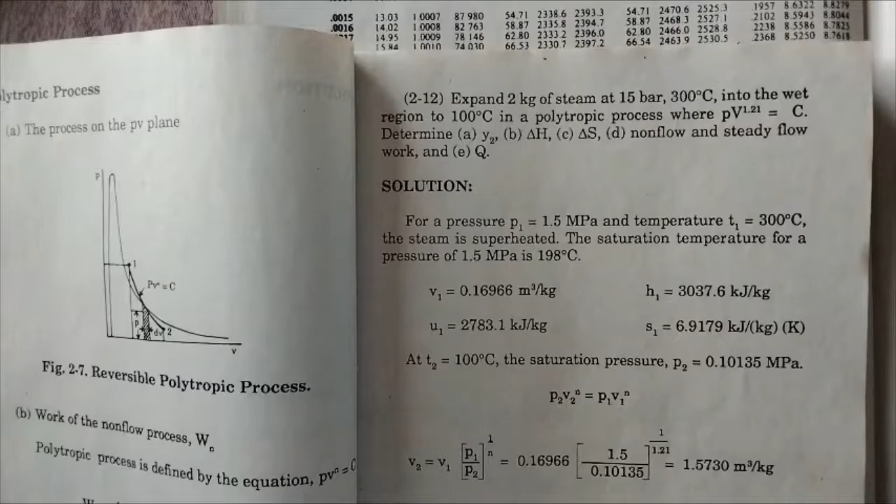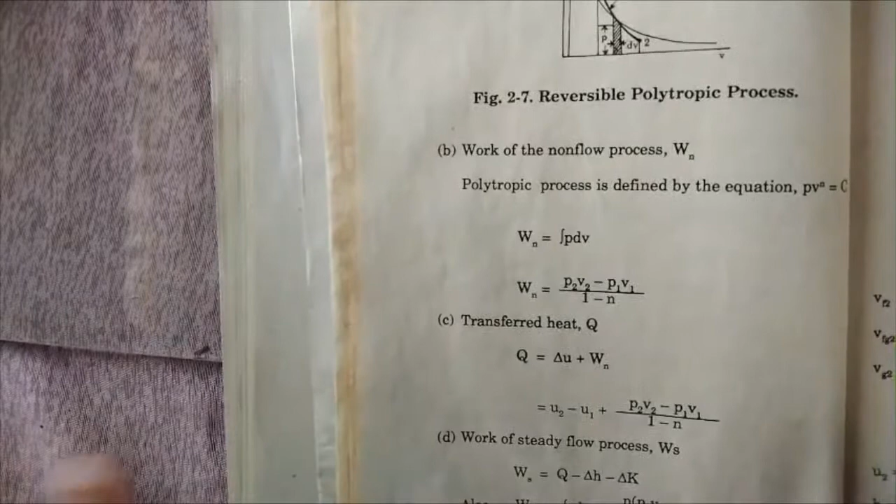Okay, so polytropic process tayo. Same formula. Recall thermodynamics 1 natin, ang work non-flow ay ito: the integral of PdV, or pwede rin siyang P2V2 less P1V1 over 1 minus n. Then, the heat transfer is ganyan pa rin, delta U plus work non-flow.

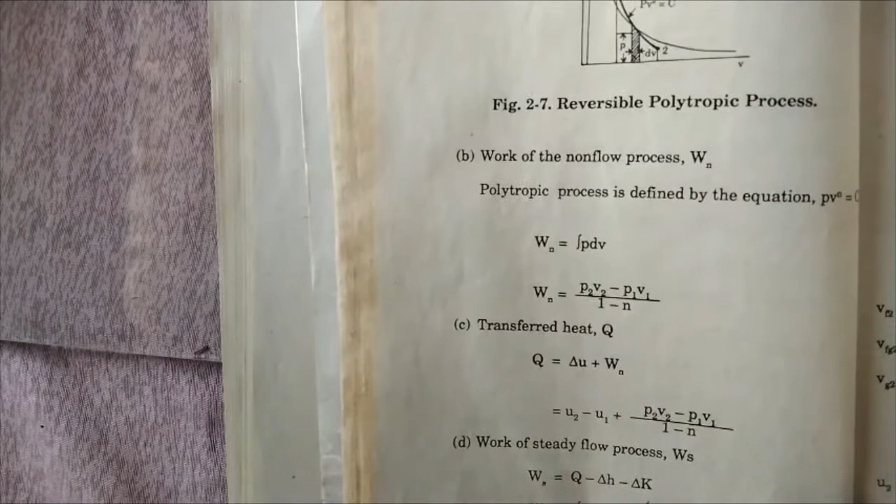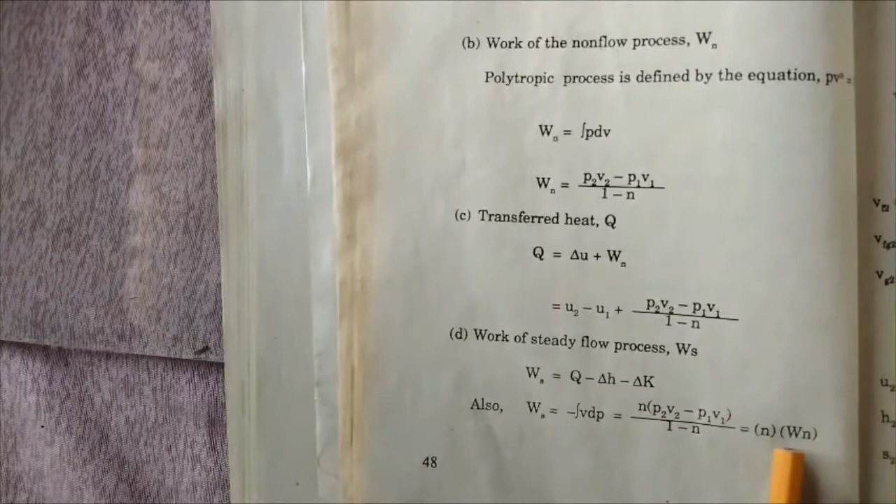Kung steady flow naman, is Q, work S is Q minus delta H minus delta K, or just recall, work S is N times work non-flow. Kapag na-solve nyo na yung work non-flow, i-multiply nyo na lang sa N, ganun na lang kasimple. Pero kung wala talaga, i-solve nyo.

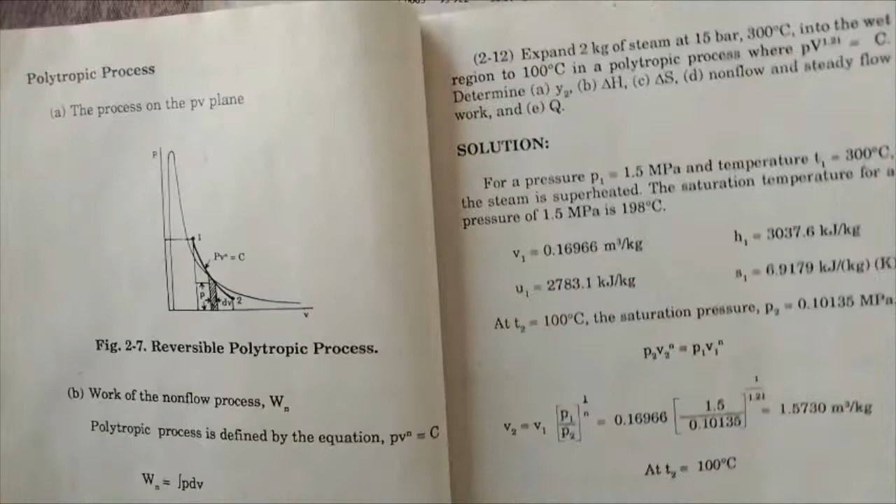Ito yung mga kailangan na formula. So, problem na tayo agad. Ito nga, 2 kg daw of steam at 15 bar. Itong 15 bar class, i-multiply niya siya ng 100 para maging kilopascal, so maging 1500.

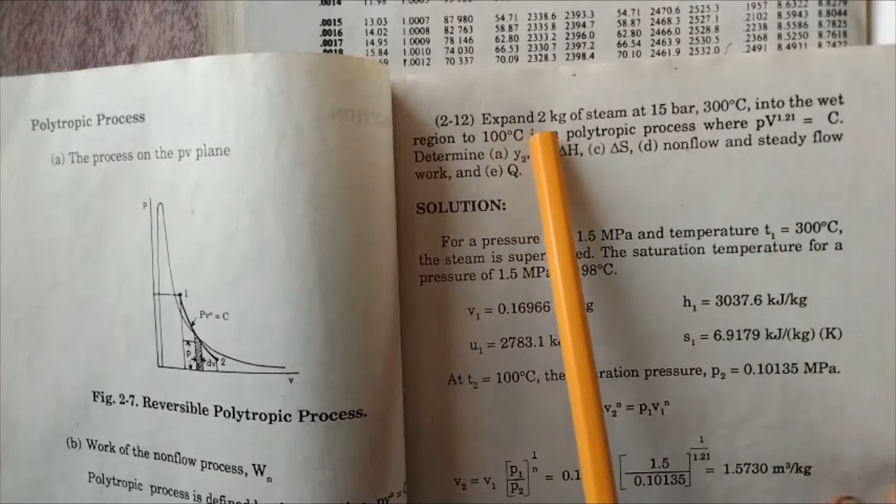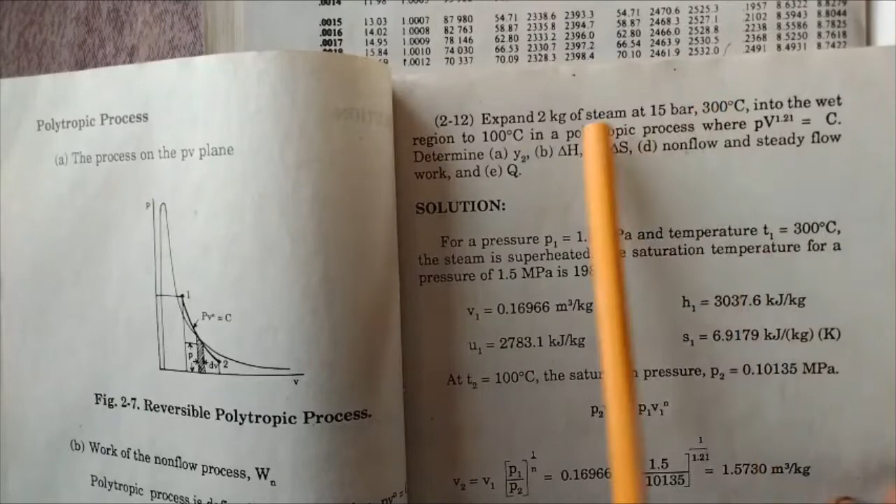And then, sabi niya rito, expand, 2 kg steam at 15 bar 300 degrees into a wet region pala to 100 degrees. So yung 15 bar and then 300 degrees, expand ba siya? Expand siya sa wet region. So, bale tingnan nyo yung 1.5 megapascal na katapat ng 15 bar sa saturation pressure.

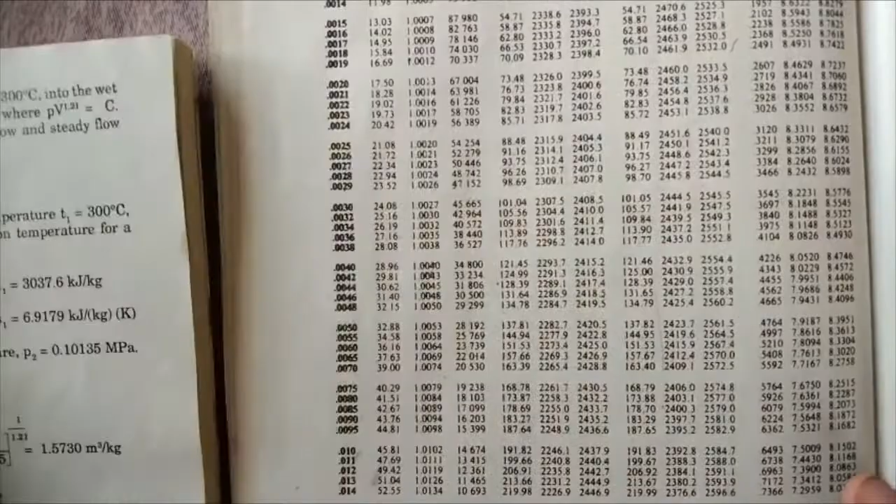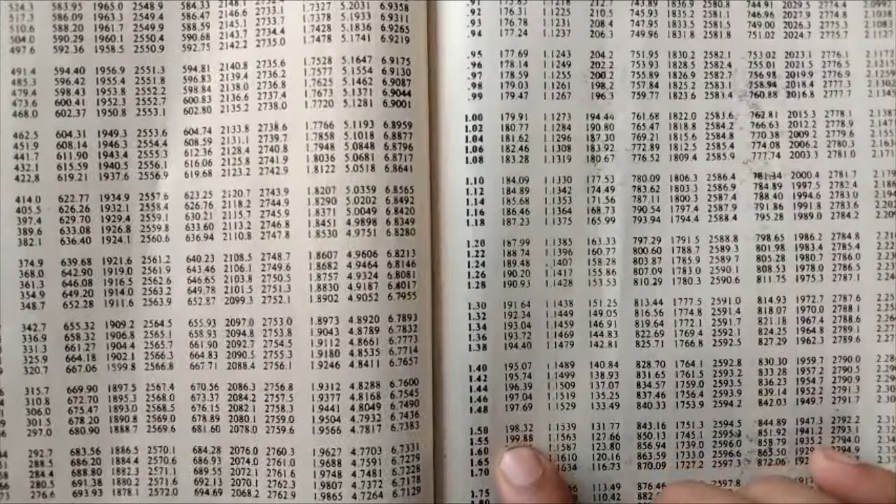1.5 MPa, tingnan natin. Para, ano lang, 1.5 MPa. Ito, 1.5. 198 yung temperature niya, is 300 to. So, superheated talaga.

So ngayon, kailangan nyo, kasi yung formula natin, recall itong relation ng pressure tsaka volume. Ito rin, walang nagbago: V2 over V1 is equal to P1 over P2.

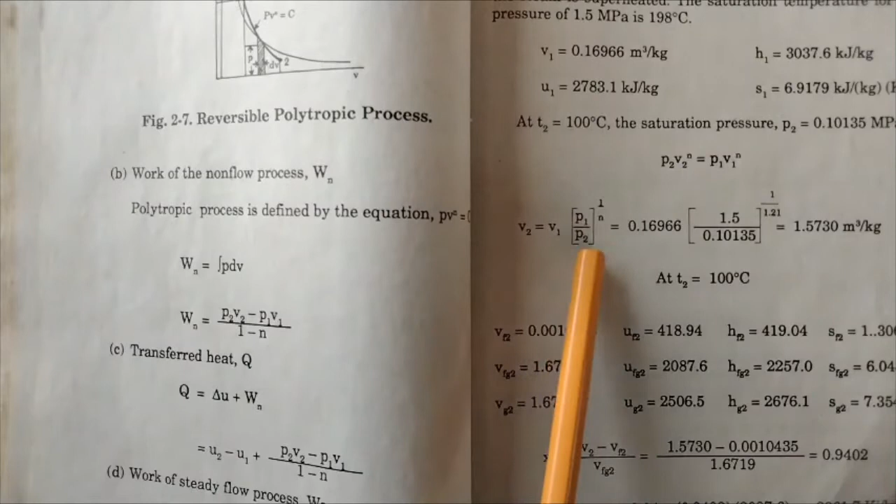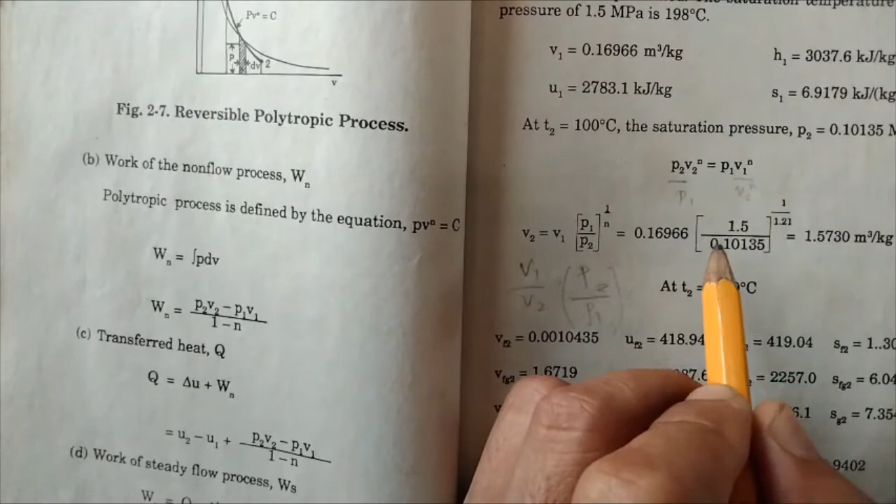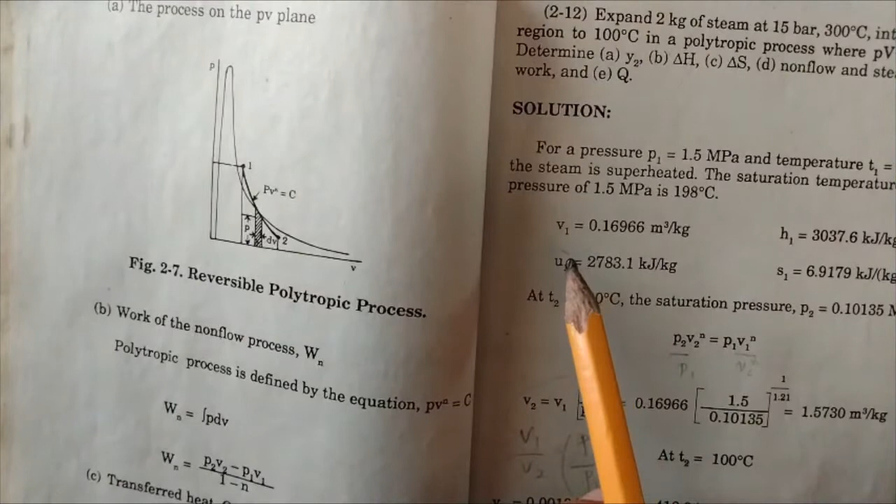Then now dito, so dito muna tayo. So kailangan yung volume, kasi nga dahil nga sa formula na relation ng volume at saka temperature. Pressure pala. So tingnan nyo doon sa 1.5 megapascal.

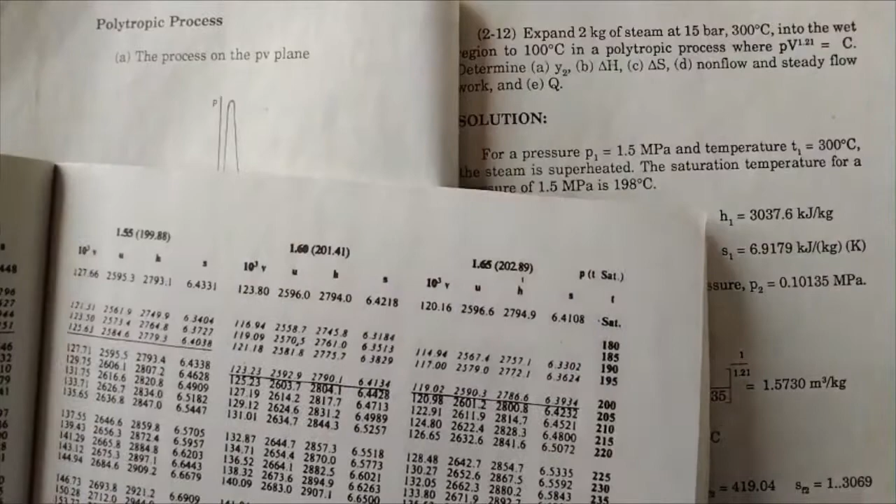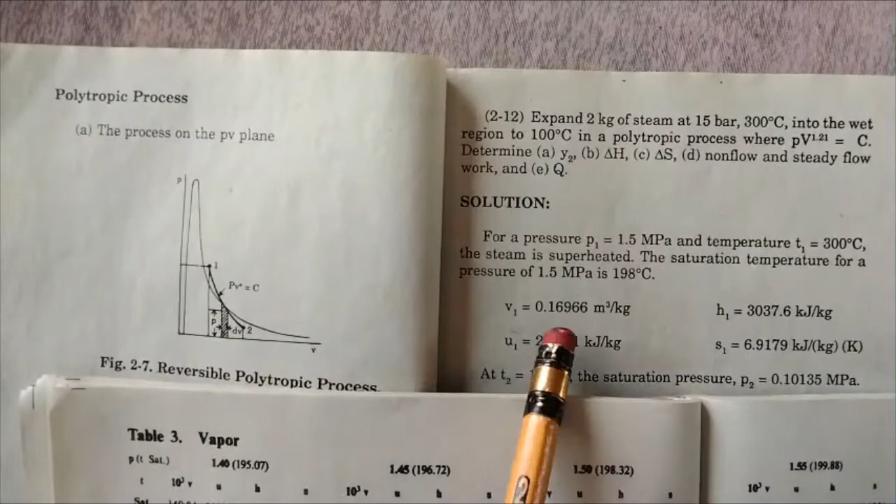Sa table 3 na tayo, 1.5. Ayun, may 1.5, so 1.5 and then 300 degrees Celsius. Andito na yung V1 dito is 169.66. Tingnan natin, tama, meter cube na, dito kasi sa steam table is liter. So, yan na, so may V.

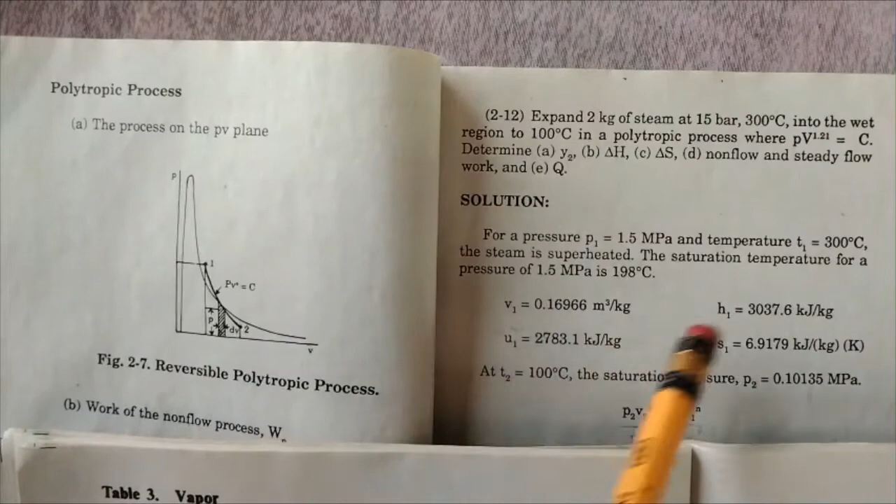Follow na rin yung matik na to. Makukuha nyo na rin H and then sa KS. Basta i-locate nyo lang yung at 1.5 and then 300 degrees Celsius. Tingnan nyo, okay, makukuha nyo yung mga data dito.

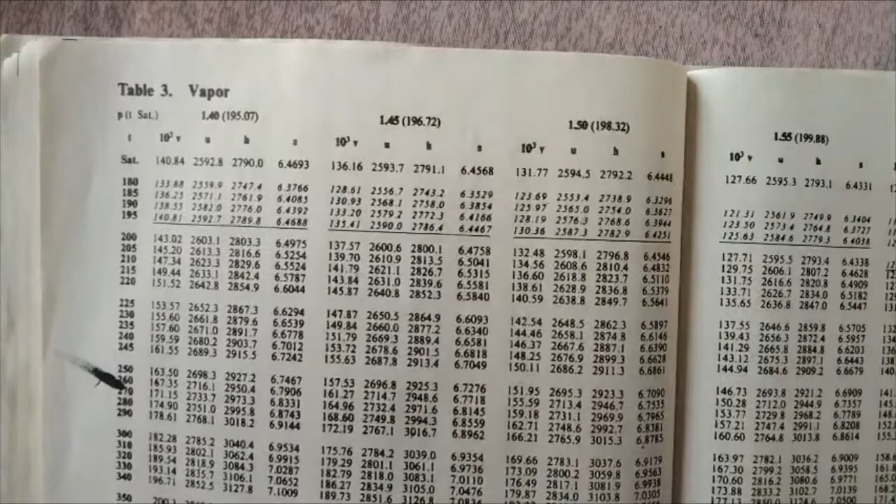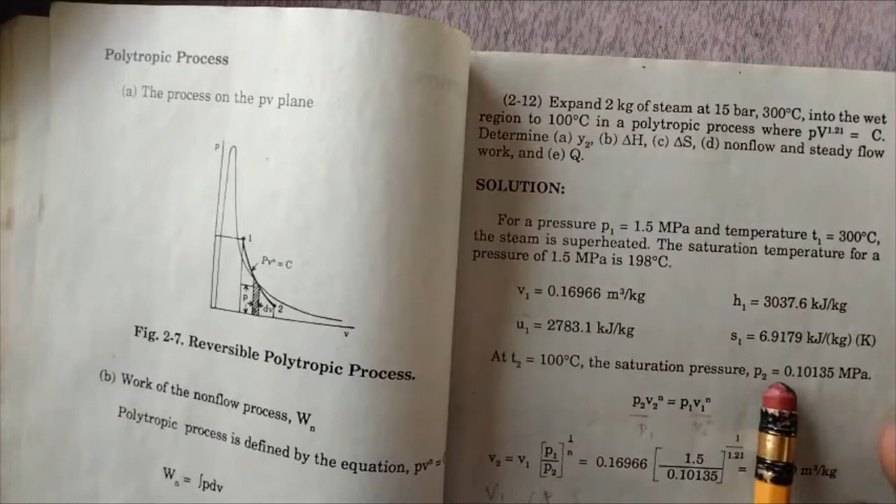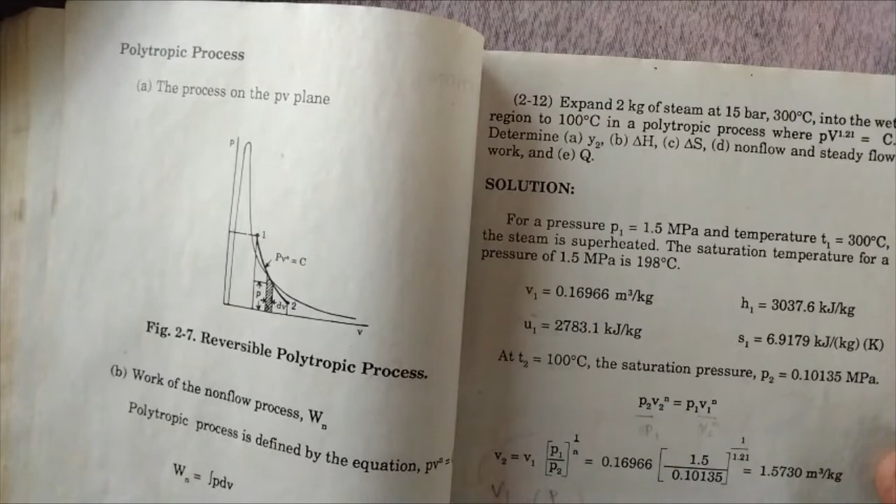So ngayon, at temperature 2 naman, the saturation pressure ng 100 is 0.1, 101.325 o 101.35 nakalagay. So ngayon, ang P2, V2, may P1 na tayo. So walang V2 tayo, wala tayong V2. So V1 meron. Yung P1 is 1.5 megapascal, and then P2 is, ito nga, tingnan nyo na lang sa steam table. So ang makukuha nyo na volume class is 1.5730. So ngayon, meron tayong V2, tsaka meron ding V1.

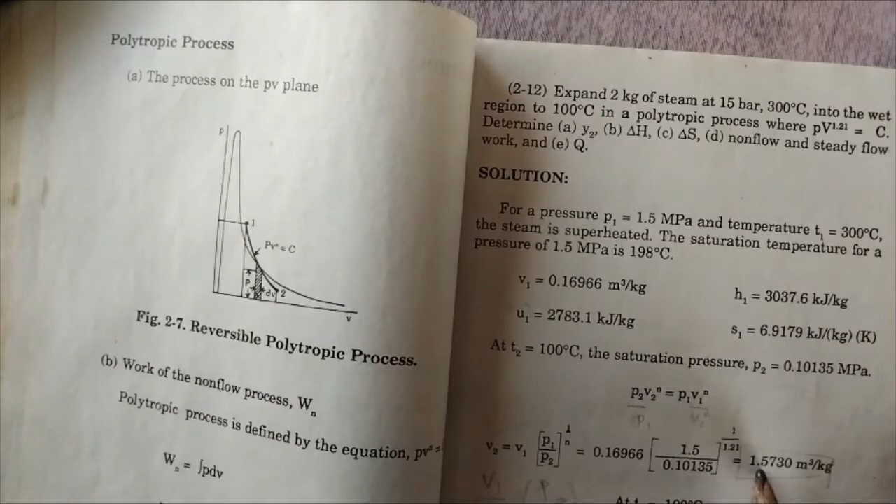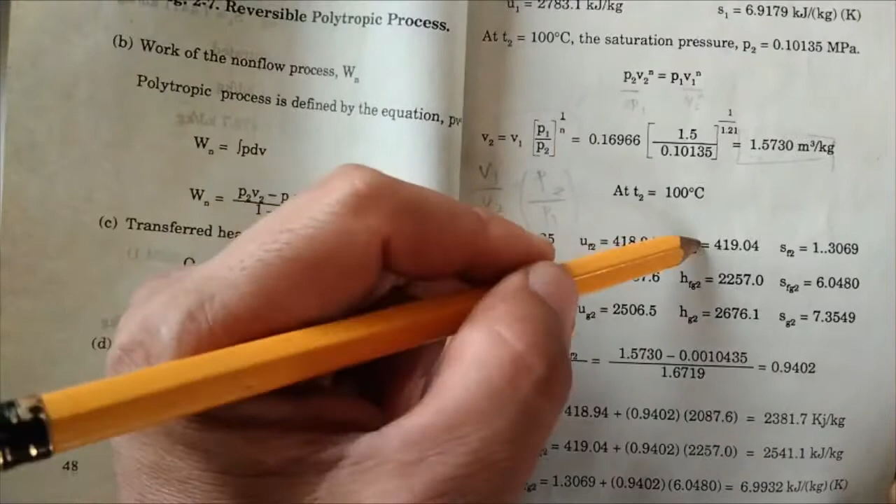Balik tayo sa mga quality. So yung at 100, makikita nyo itong VF na to, VFG. Walang VFG sa steam table, but pag minusin itong VG tsaka ito, so magiging VFG siya. Then same as yung U, UFG, UF, UG, HF, HFG, then ganyan. Kasi nga yun nga yung tinatanong niya.

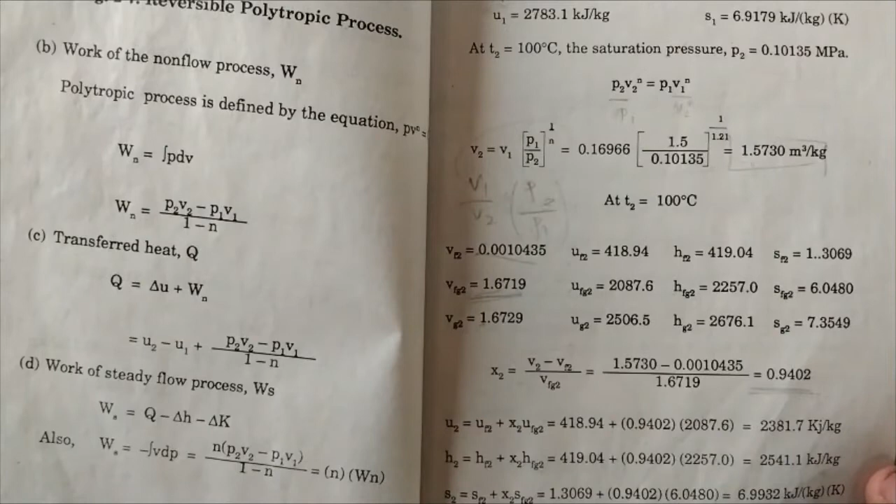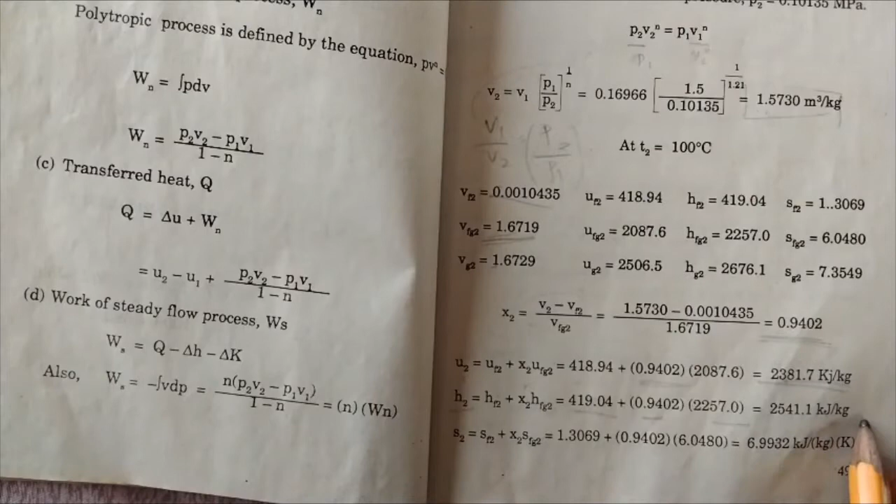So now, solve nyo yung quality. Ito na yung quality na makukuha nyo, 0.9402. Then for U2, yun nga, UF2, meron kayo nung solve nyo na yung quality. Direct substitute nyo na lang, makuha nyo yung mga yan. H2, ito, the quality, HFG, so makukuha nyo yan. Yan, tsaka yung entropy, SF2, ito yon plus yung quality, and then yung SFG.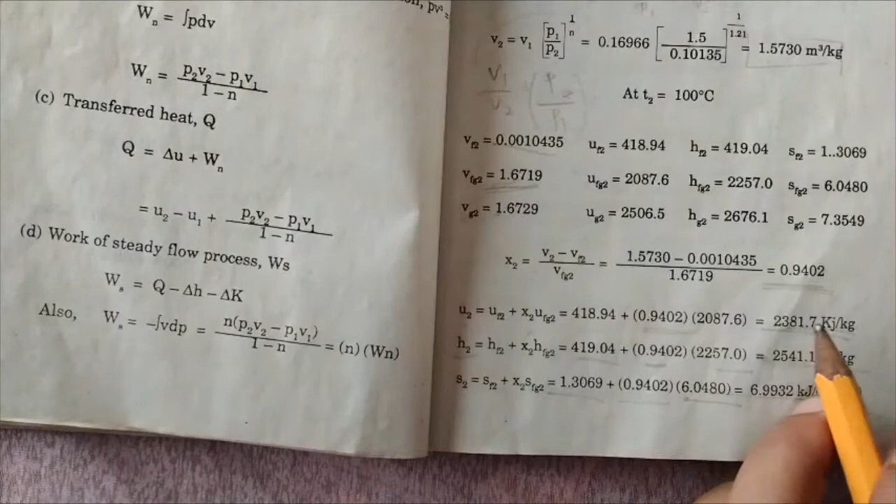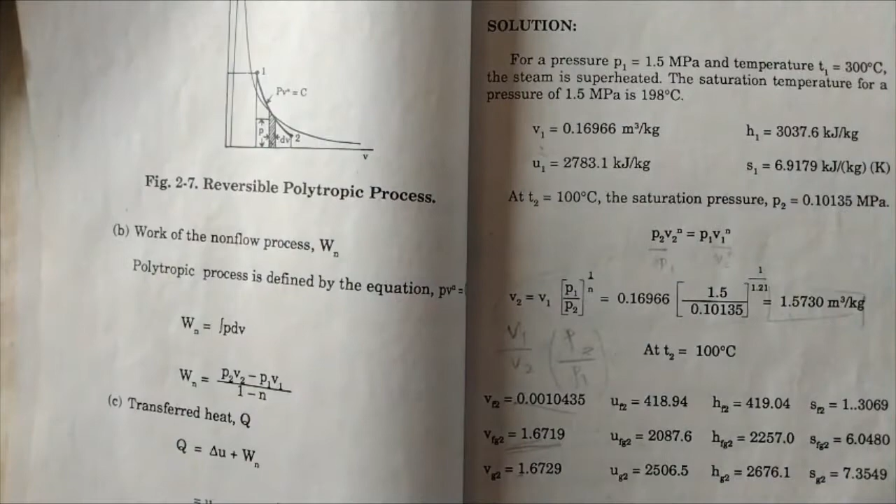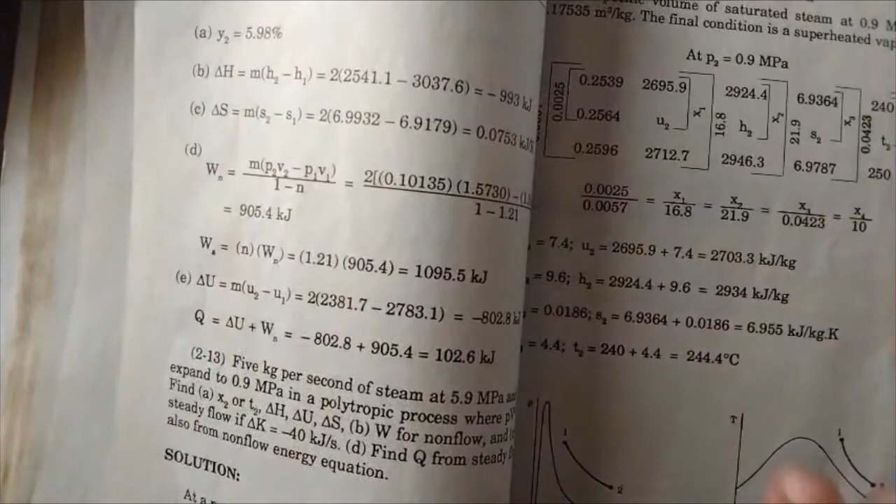So, yun na yan. So masasagot nyo na yung Y2. Ang Y2 lang class, yung tinatanong niya lang, yung Y2 dito na tinatanong niya is kung ilan yung tubig nung mixture. So madali lang: 1 minus 0.9402. Yun na yun, yun na yung 5, yun na yung Y2 niya, which is 5.98%. Minus nyo na lang. So, for delta H, ayan na.

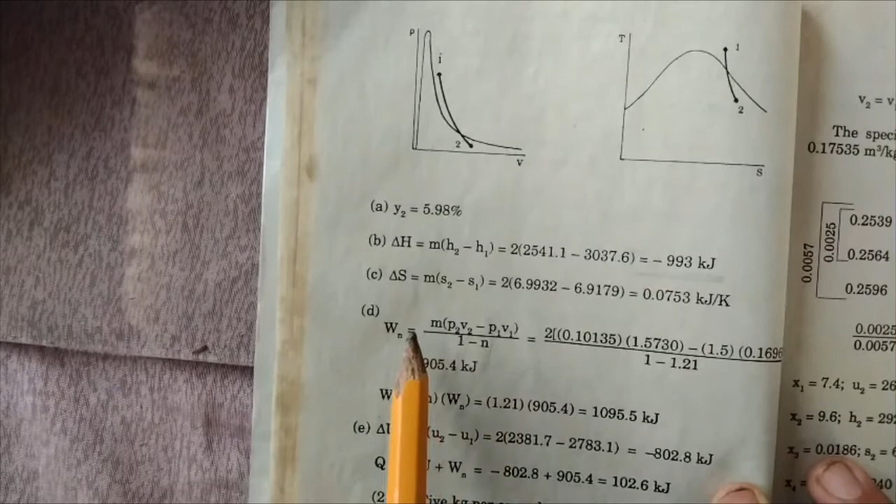Since mass is given as 2 kg, the delta H you solve is negative 993 kilojoules. And then for delta S, S2 less S1, it's 6.99 less 6.91, so that's the answer.

The work non-flow, of course, is mass times P2 V2 less P1 V1 over 1 minus N. Since everything is given, you can directly substitute. So the answer is 905.4 kilojoules. And then work steady is N times work non-flow.

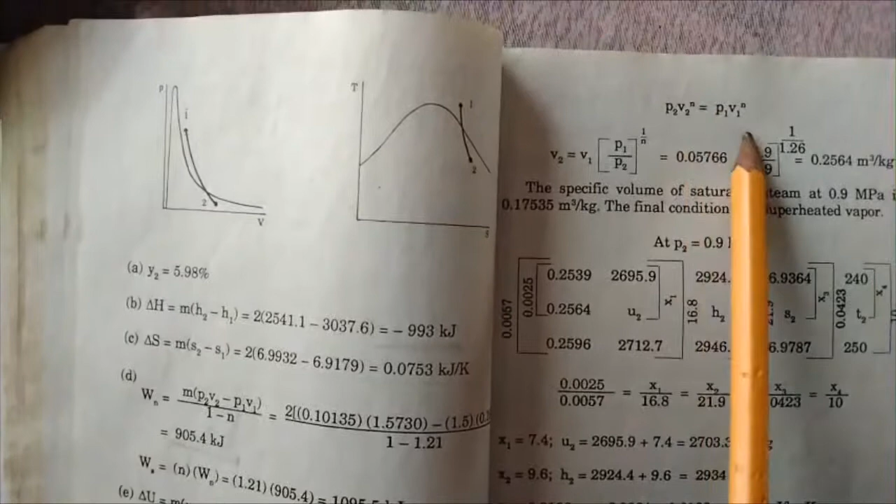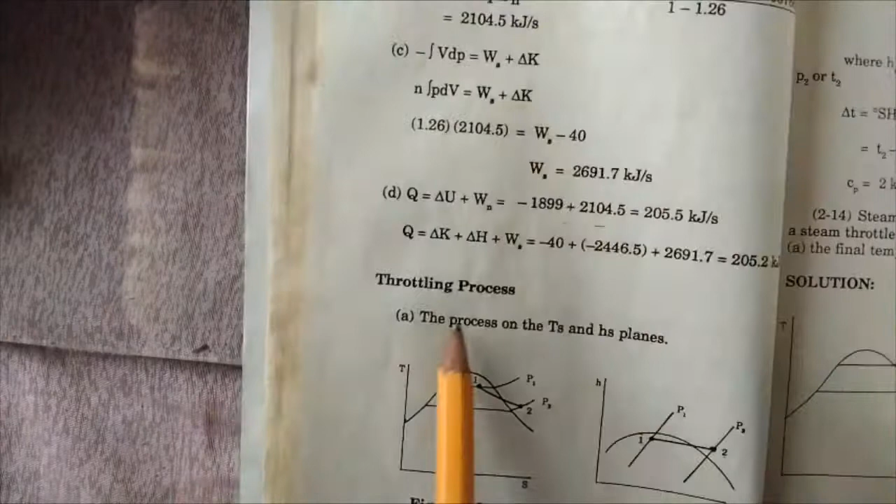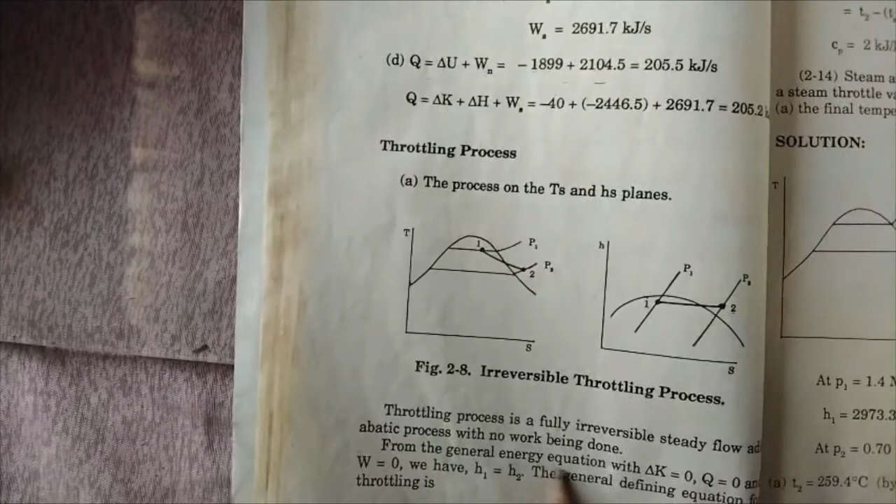The throttling process, guys, means enthalpy 1 is equal to enthalpy 2. For the general energy equation, delta K is 0, Q is 0, work is 0. So here it really just comes down to H1 is equal to H2.

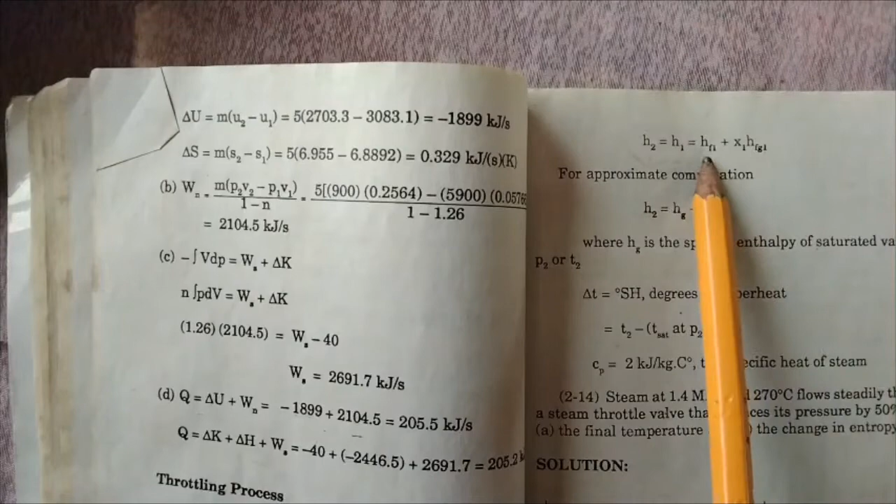For approximate computation, H2 is equal to Hg plus the CP of steam, which is given here, times delta T. The delta T is the degree of superheat, where Hg is the specific enthalpy of saturated steam at P2 or T2.

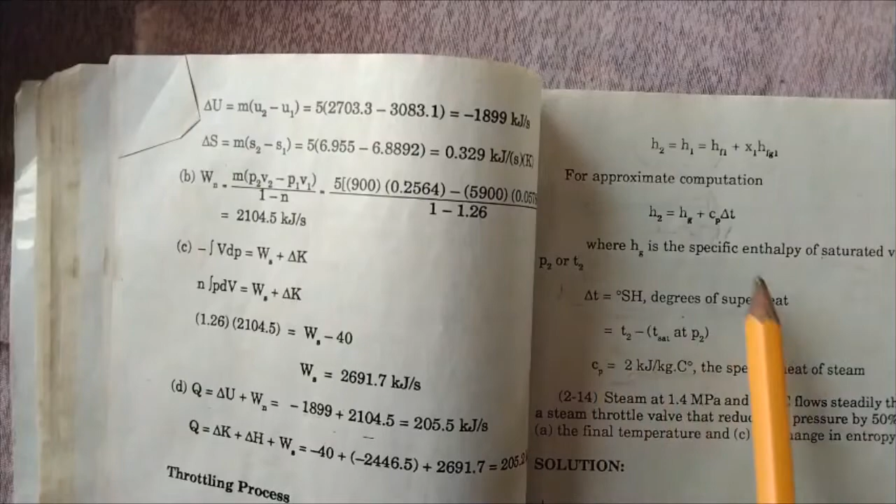So here's the problem: steam at 1.4 megapascal and 270 degrees flows steadily through a steam throttle valve, that reduces its pressure by 50%. Find the final temperature and the change of entropy.

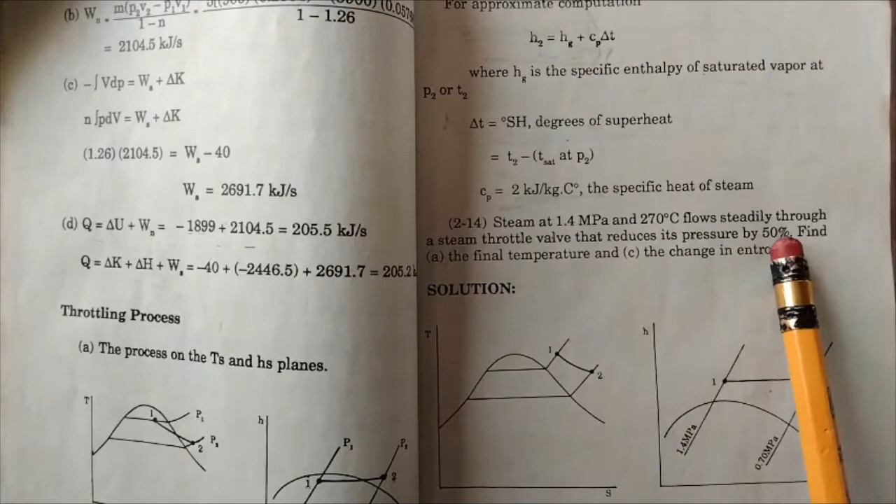So H1 is equal to H2. What's being asked here is the final temperature and the change of entropy. When it says 50% of the pressure, that's 1.4 divided by 2, or multiply by 50%, giving 0.7.

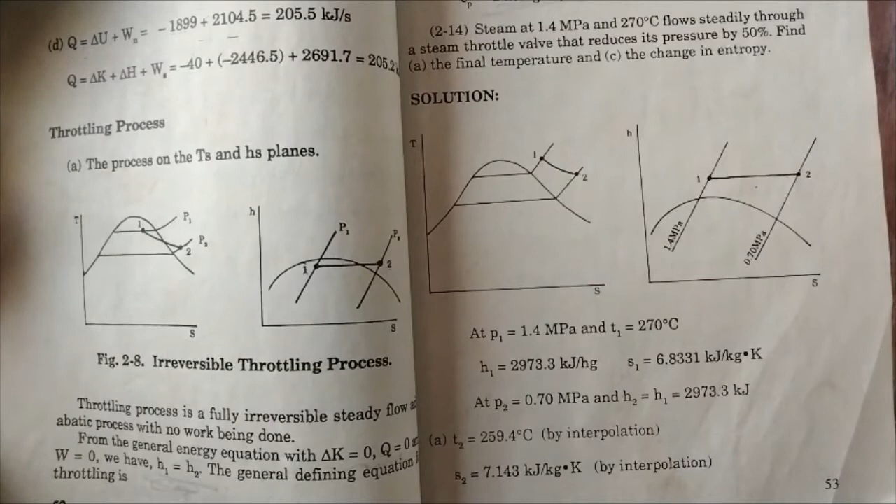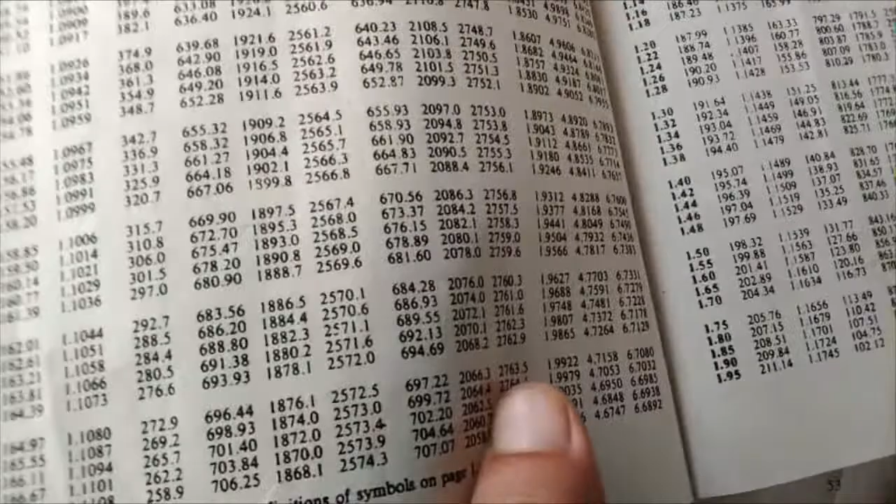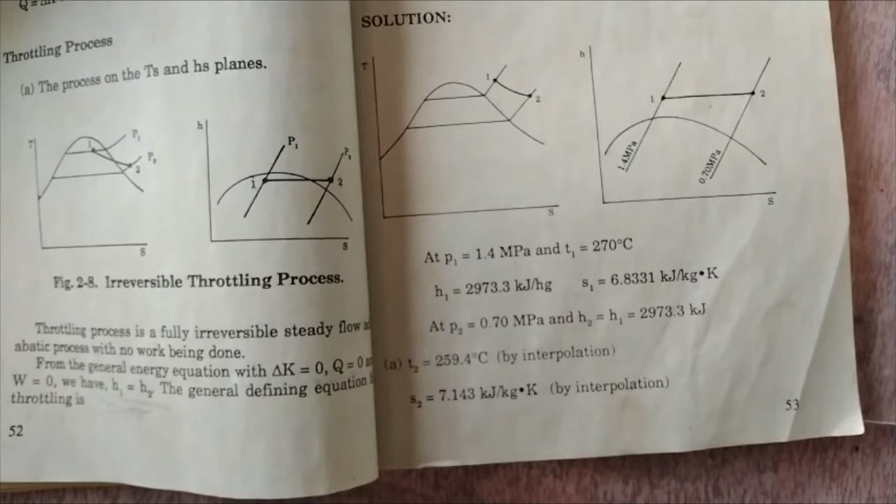So it's superheated, go to table 3 and interpolate this. By interpolation, the temperature is 259.4. Let's check at 0.7 in table 3... it's not interpolated there actually.

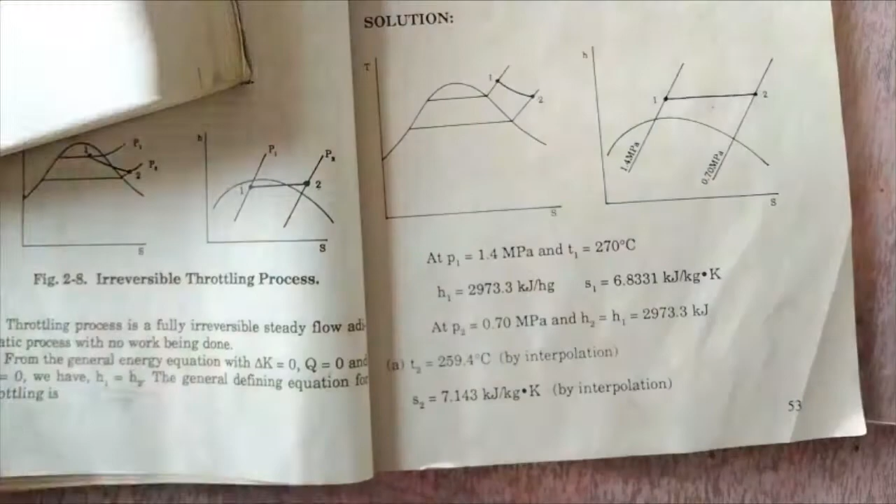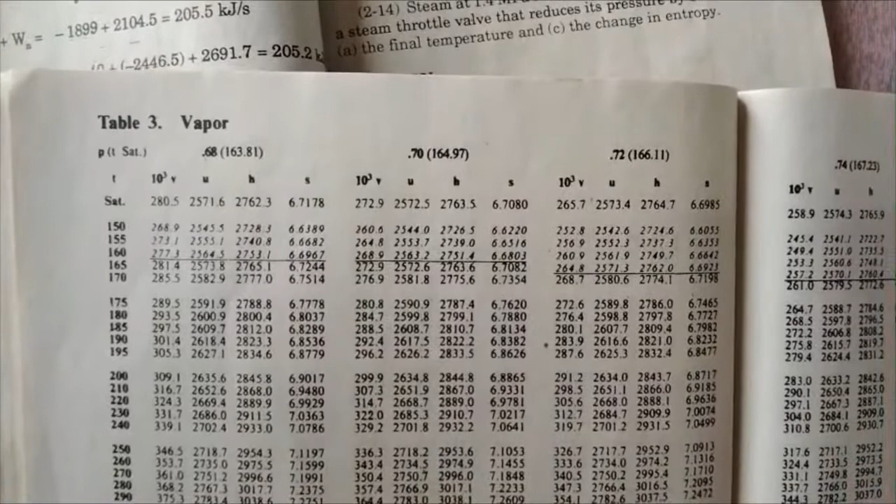At 0.7, look at 2973, check where that falls. It's in between 250 and 260, with values 2953.6 and 2974.9, so it's in between those two, giving the answer 259.4.

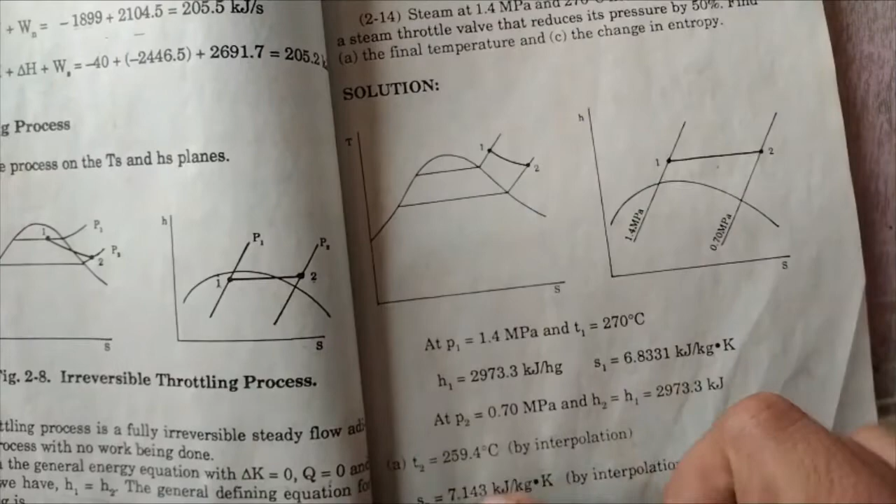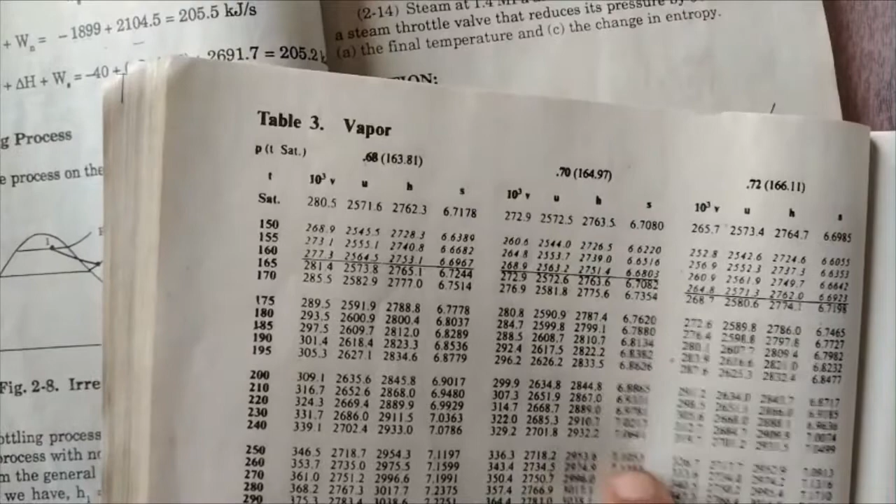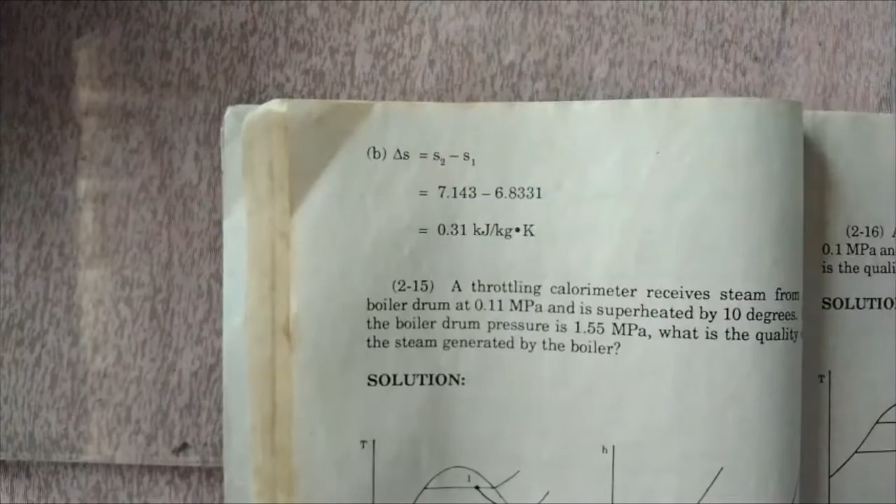By interpolation, 7.143. And then for delta S, that was interpolated earlier too, giving 0.31 kJ per kilogram. So that's it, next topic now.

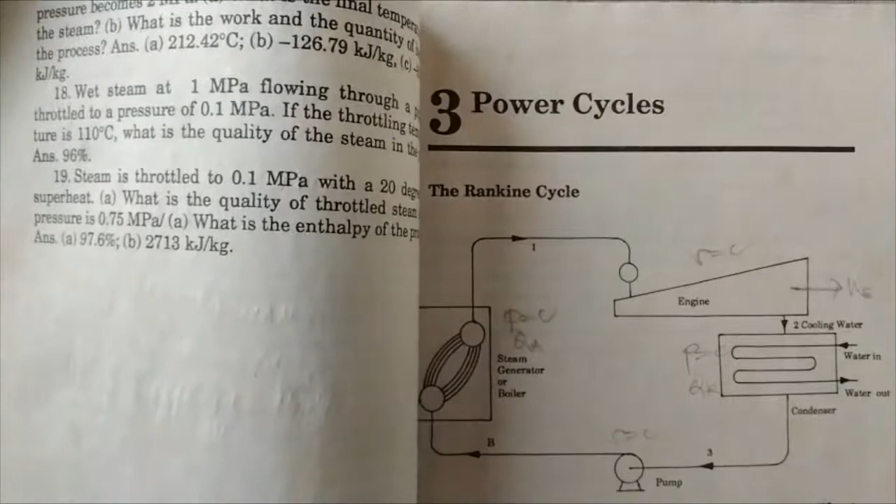The power cycles, starting with the Rankine cycle. First the ideal Rankine cycle, then the actual one. Next video, we'll be releasing videos about the power cycle.